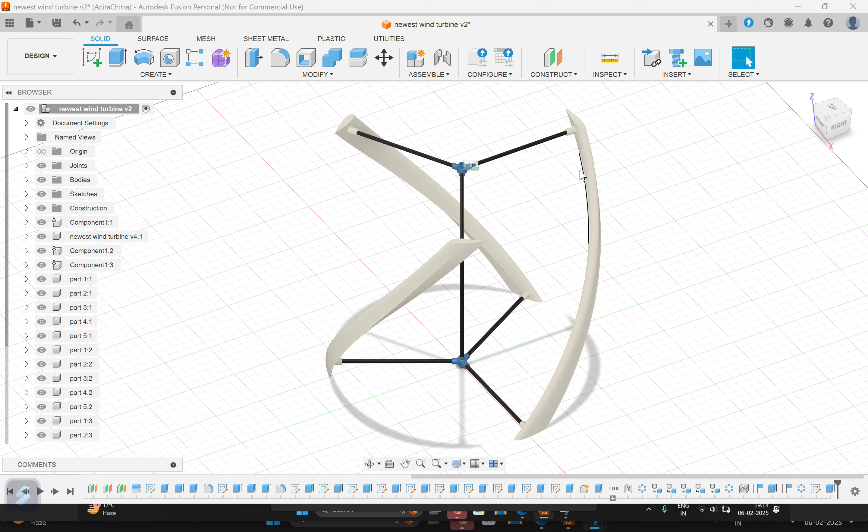Tour of our vertical axis wind turbine. So as we discussed before, it's a three blade design with the NACA profiles that we were talking about originally. In this case, I have chosen the NACA 0018 profile because according to my research, that was the best one that was suitable for our purpose.

Now, as you can see, it follows a tubular structure to attach all of the wing blades into a single structure. And to do that, we have used this hub and spokes method here. And I have designed this hub that is colored in blue to attach all of the tubes together.

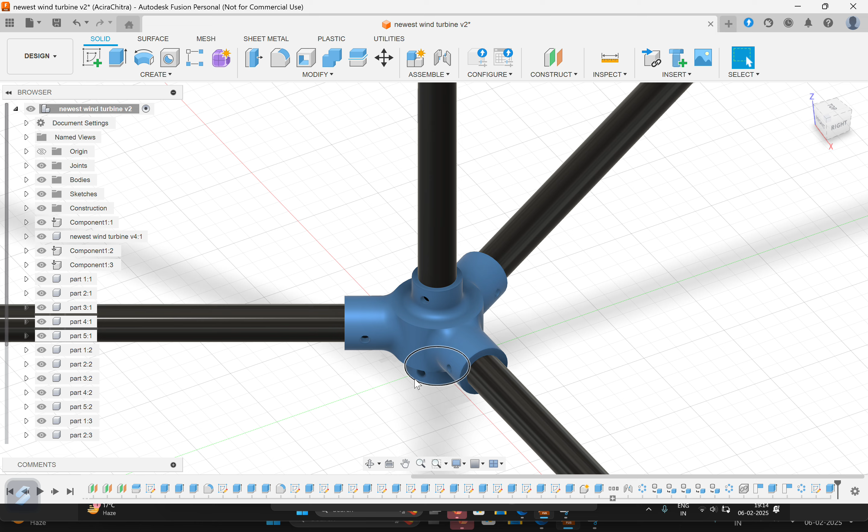Now you'll notice there are three tubes on the top and bottom each that connect the three turbine blades together, and then there is also a larger singular central tube, and the purpose of this is to increase the rigidity of the model and to make it more durable.

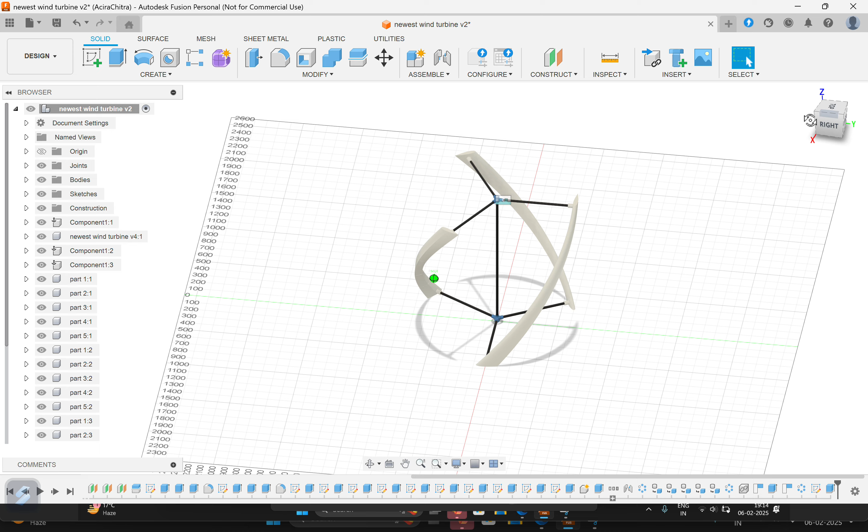Now let me talk about the actual single blade itself. So the way it's going to be printed is, because it's so large, a 3D printer cannot print such a large model single-handedly. So it has to be split into parts. So what I have done is I have split it into five different parts, and each part has a numbering on it.

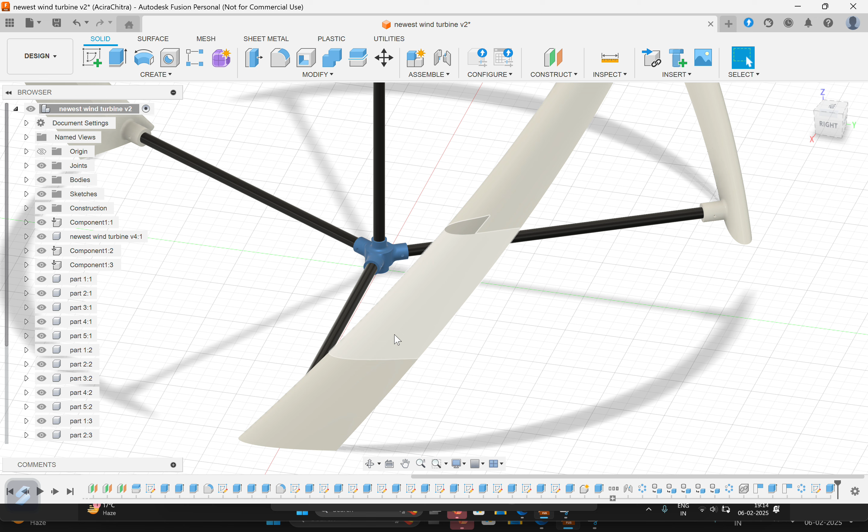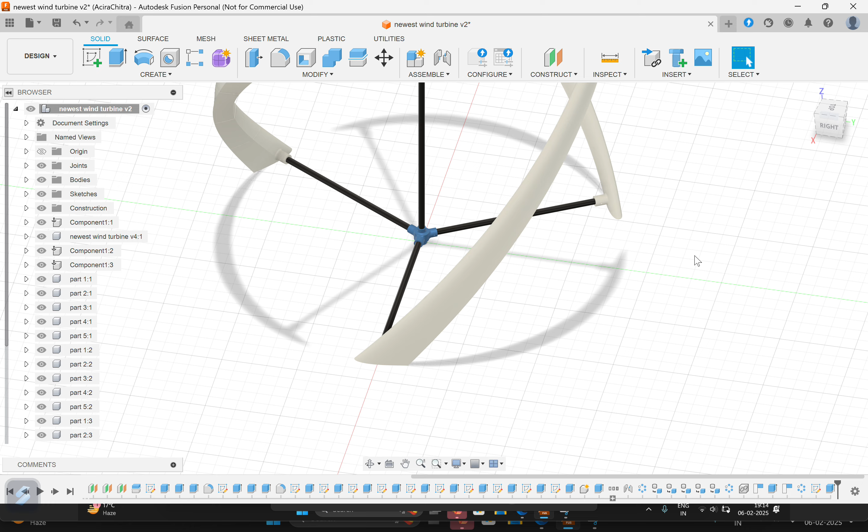So for example, if we take a look at this, I'll just hide this one. So if we take a look at this, this has a numbering of 1 on it. Okay, so remember that it has a 1 on it. Now if I show you the bottom side of this one, this also has number 1 on it. So what I have done is I have numbered all of the faces, so it's on other faces too. For example, this one, there's 2 on it.

So this will help us align when we are gluing the different parts together. This will help us align the different faces together, and you'll get to know which faces to glue to which faces. So that's a convenience factor that I have added.

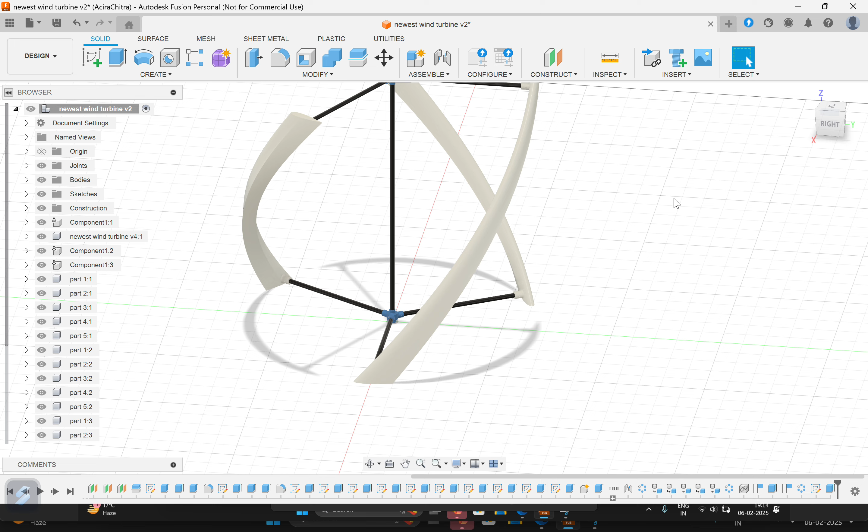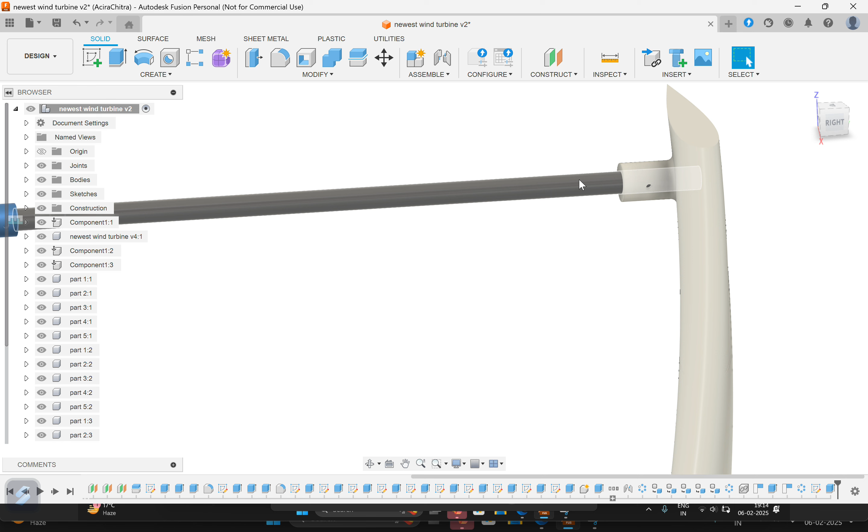And next, about the tubings. So these tubings can be made of anything, and in this case could be PVC pipe or some type of aluminum rod. Could also be carbon fiber rod if you prefer. So right now I have taken 20 millimeters as an outside diameter for these tubes, because according to my research those are common tube sizes and that should help us reduce some costs.

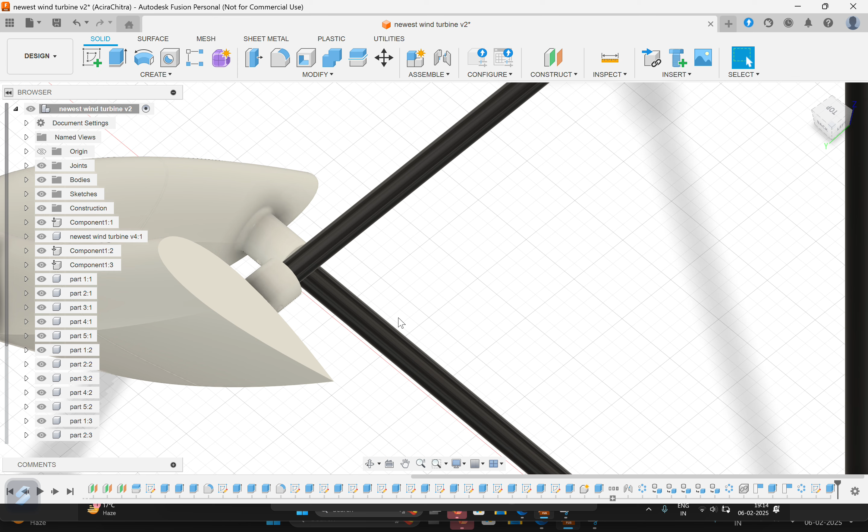And for the actual attachment of the tubes, what we'll do is we'll drill a hole through the tube, a 5 millimeter hole, and then if you can see the hole right here, we'll pass a screw through it, a nut and bolt. So the screw will enter this side, and then there will simply be a nut on the other side, so that will attach the tube to the wing blade, and that's how it will work. So as for the actual glue, we are going to use some high strength epoxy to glue all of these individual wind turbine parts together.

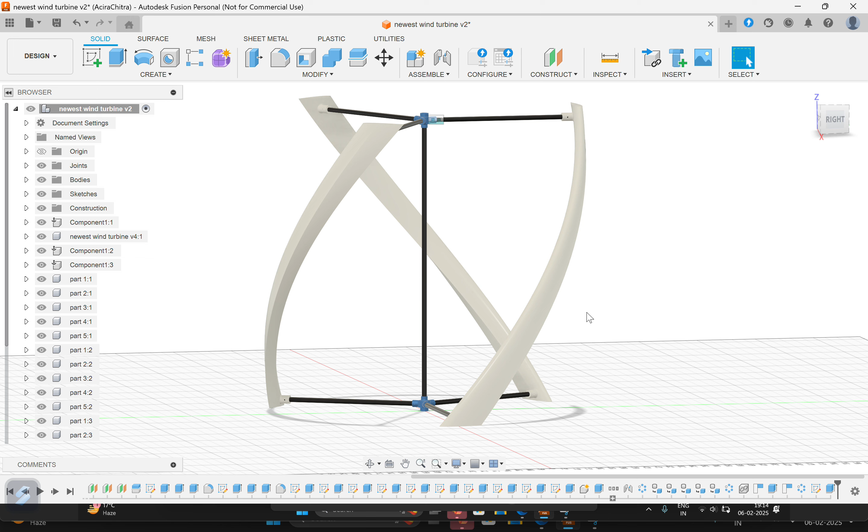So the total number of 3D printed parts is 3 into 5, because 5 parts per blade, and there are 3 blades. So 3 into 5, that's 15 parts. And then we also have two of these hubs. They both are identical. So that's 17 parts. So once you place the order, you'll get 17 parts that you will have to manage and assemble.

Now let me talk about the hub a little bit more. So you talked about having a 24 millimeter shaft for the generator, right? So I have included that in the hub, and that's the shaft point right here. So right now I have designed it such that it's a perfect fit and it would be held with tightness and friction to the shaft. But if you have any other ideas in mind on how to attach the shaft to the turbine, please let me know. Thank you.